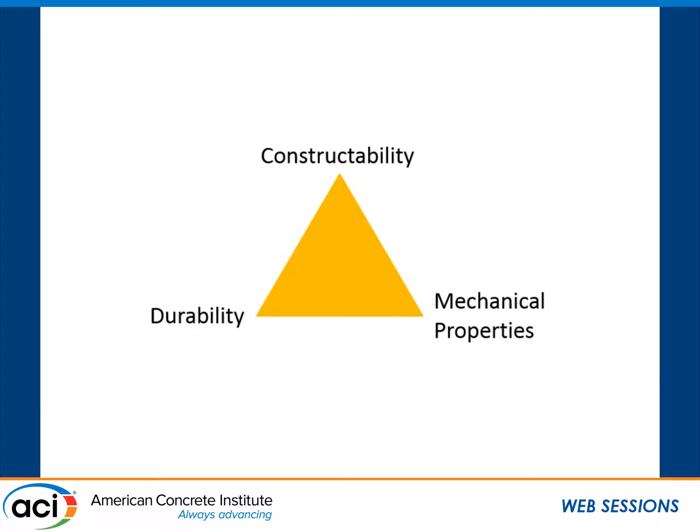Well, I must say that what Ramon said, most everything was absolutely correct. And that's something that has changed, though. Everything he was saying about constructability has to be constructible. We want durability. A lot of specs call for durability, but it has to be constructible. We have to work with material, mechanical properties, structural properties as well. So all these have to be in balance. And typically in the objectives of construction, you're always balancing cost and performance. It's a typical motto for engineers, is to balance that.

But it's changed a bit. The owner will say, I want 125-year service life. I don't want to tell you I want 5,000 PSI. So what's really been the big change is engineering community, the contracting community, used to see specs that called out for at least 5,000 PSI concrete. Now they're seeing something that's 125-year. How do you balance that? How do you bridge that gap? And that's what the whole field of service life engineering has come about because of that.

Now, another thing that's been a huge dynamic is now 51% of all contract vehicles are design build. Design build and operate is making a large change in the way the construction industry conducts its business. We'll hear from Kiewit and the like. That's a main bloodstream for the contracting community is design build now. Because it's design build, the engineer and contractor team up. And that's a big change from the design bid build world where you have a lot of this conflict, finger pointing.

What's good about the new world of design build and design build operate is the fact that you can actually do service life engineering in conjunction with each other to make sure you have your constructability issues and your strength issues and your durability issues to meet the specifications.

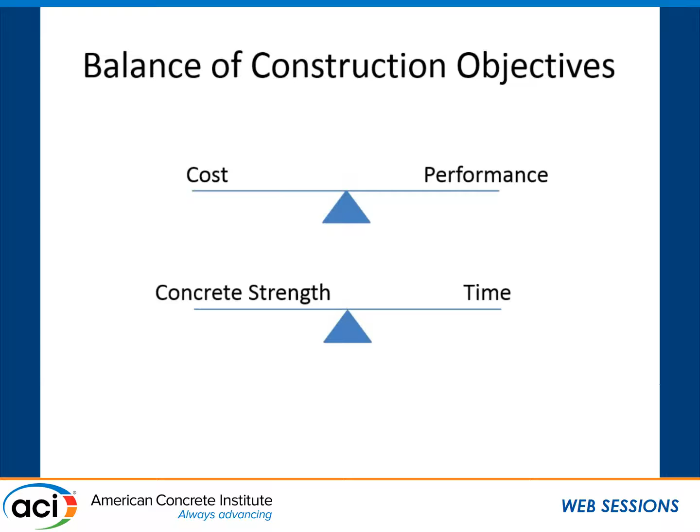An example of some projects that are currently underway that are requiring service life engineering, the St. Lawrence Bridge crossing in Montreal. I must say that it would be nice when they name it because it's all called New Bridge over St. Lawrence. But this bridge has a 125-year service life. It's fast track, has to be built in 2 years.

So it's a very, very aggressive attack. This is a design, build, and operate, where the design and construction team design it, build it in conjunction with the maintenance programs from the operator, and then the owner, country of Canada, wants to know what the condition of that structure will be at 30 years.

They also have some milestones for many different elements. Some are replaceable and some are not. So there's a very complex world with the service life engineering where they're calling out for years, but they're not always the same 125 years. But the contractor and engineer can now team up and look at all the materials available and means available to do this at the lowest cost.

This was St. Lawrence Bridge crossing. This is Lavalin and T.Y. Lin and IVT, main teams.

The Goethals Bridge in New York City. This is a $1.2 billion project, one of the first major design, build, and operate contracts from the New York, New Jersey Port Authority. The structure here has 125-year service life as well. Most of the main elements on this bridge is 125 years. This one's we're working with Kiewit on this project.

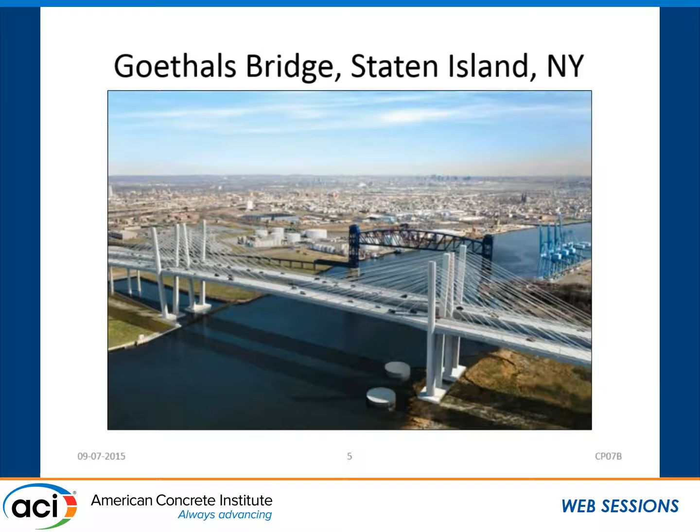The K Bridge in New York City, the same way, 125-year service life. And Tappan Zee Bridge. These are all monumental bridges in the U.S., and this is not all of them. There's at least another dozen structures that all have the specification for service life requirements.

How do you get there? What it is it's a team. Every one of these are a design-build project. So when you have design-build projects, you can actually look at what the owner's looking for and do so in a constructible way that has the strength and aesthetics that you're looking for.

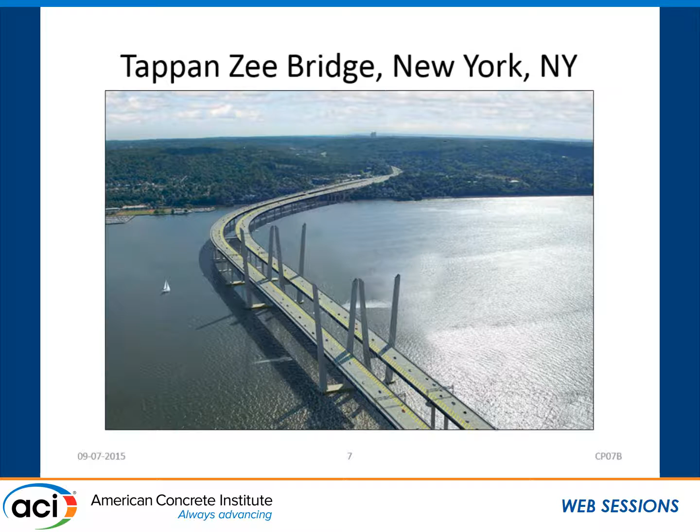A couple case studies that we did. I picked two of them. This is the Pier 5 project in Portsmouth, Virginia. It's set up so you can have 2 aircraft carriers on service at the same time. Owner is the Navy. It is a pier. What they're requiring on this one is a 75-year service life.

Case 2, this is that bridge across the St. Lawrence.

That's a 125-year service life. And the owner is the country of Canada, not Quebec.

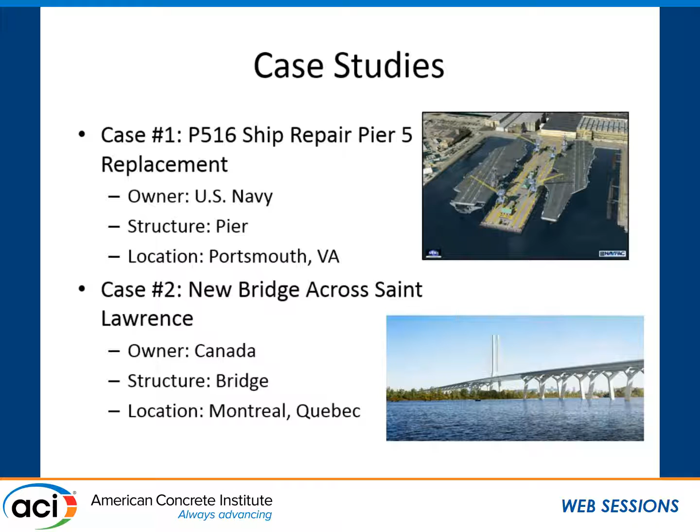On the first case, the project requirements, when you had to put a submittal together: example case 1 is where the design build team puts together the materials, the submittals, all the test materials that are needed to submit into a durability plan to the Navy. So that's what happened, where they put all the requirements there.

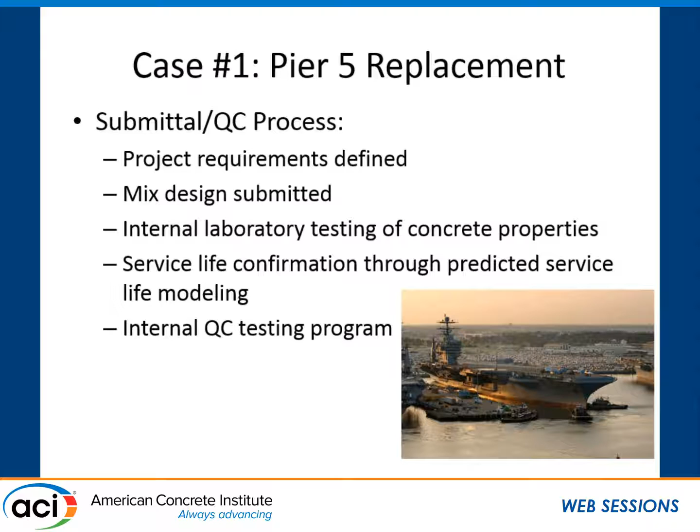The mix design was submitted. The internal laboratory testing is internal to the design build team. The service life modeling justifies their design, and each concrete element and mix would have its own specific quality control plan.

Some things the project had requirements on were service life, defined as the corrosion initiation plus the propagation period, which was about 10 years in the specification. They wanted 75 years to be met.

What they did was try to eliminate some of the guesswork and variability that could occur. The Navy set a lot of the boundary conditions for the modeling itself: temperature, humidity, exposure conditions by element, put together within the specification itself.

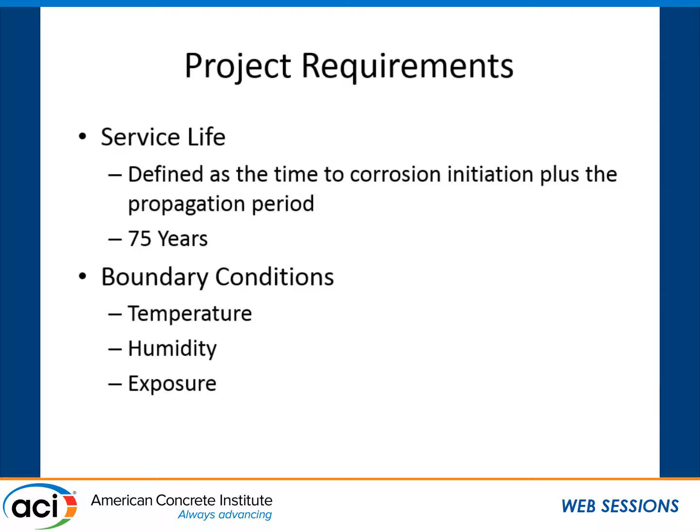The submittal package would then have your durability requirements by the element, the mix design submittal, the concrete mix testing, service life modeling, and then the quality control plan.

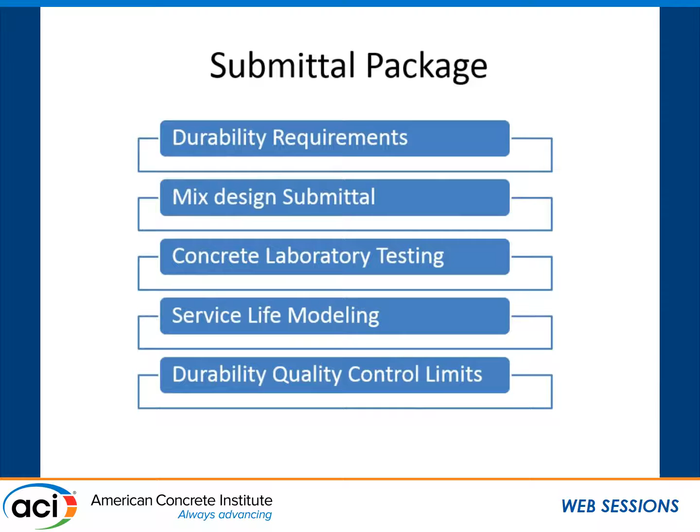The mix design would have the typical mix design you would have: the proportions, the material sources, the concrete properties, the historical performance, the cement mill certs, and the like.

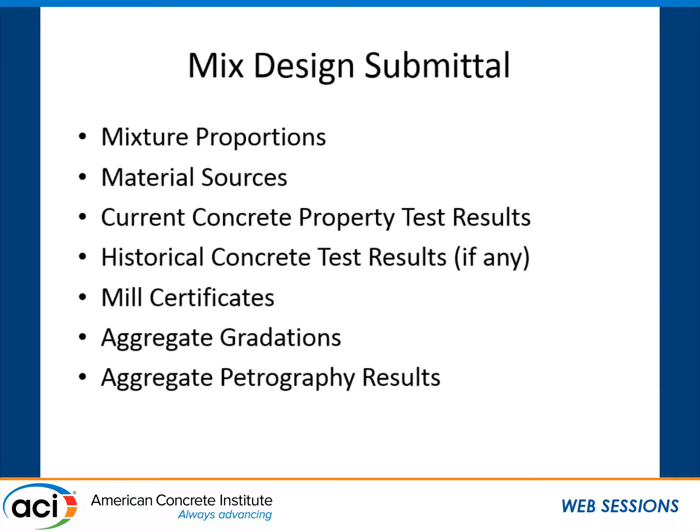The laboratory testing on service life engineering is a little different. What you'd have is the laboratory on transport properties, how things come into concrete and how they come out: the porosity, the ion diffusion coefficient, and the moisture transport coefficient.

Essentially, porosity tells you the number of available voids. The ion diffusion tells you how tortuous those void systems are. And the moisture transport is how water moves in and out.

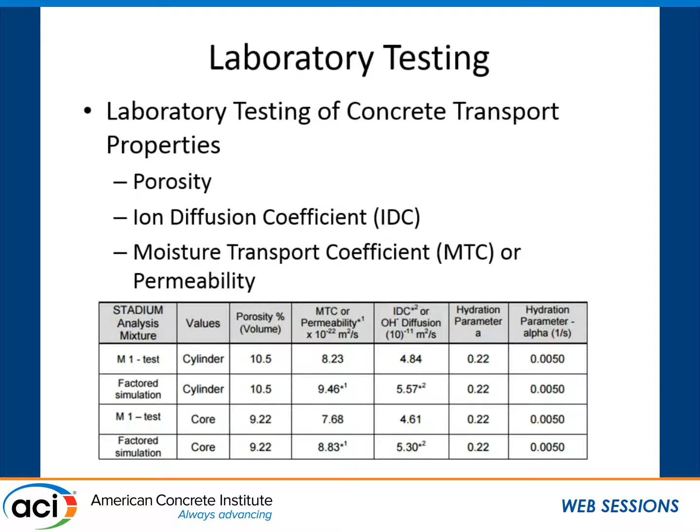So what you would have is a mix, and in the case of the Navy, they wanted a mock-up put together as well as laboratory mixes. So you would have cylinders and cores, and you would have the test results from those so that we can use those going forward into a quality control program.

The data itself would be modeled where you would have predicted chloride content, duration in years, and then eventually critical levels of chloride that would cause corrosion—whether you do nothing with the black steel, or use galvanized or different levels of corrosion inhibitors, you'd have an extension.

As time goes on, you'll see that at this concrete cover, predicted chlorides without any protection means would not make the 75 years. However, putting in a protection system, like calcium nitrite or a different type of reinforcing, will definitely get you that propagation time amount on a deterministic basis.

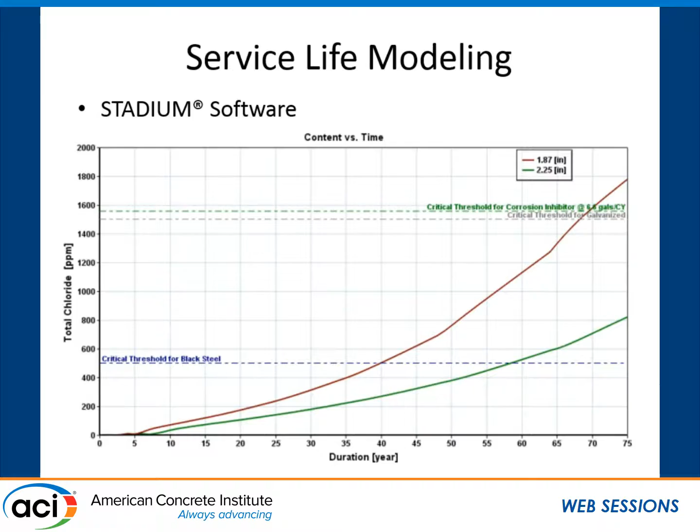Now, when you establish your quality control program, if you know your limits on your properties, then you conduct a lab test to check the compliance of that. If the IDC test data is below requirements, it's acceptable. The lower the number, the better.

Higher than that, it would go into modeling itself. Let's take that value—in itself, that one value doesn't say yes or no. So what you want to do is then model it, to see if it meets those requirements and is acceptable or not.

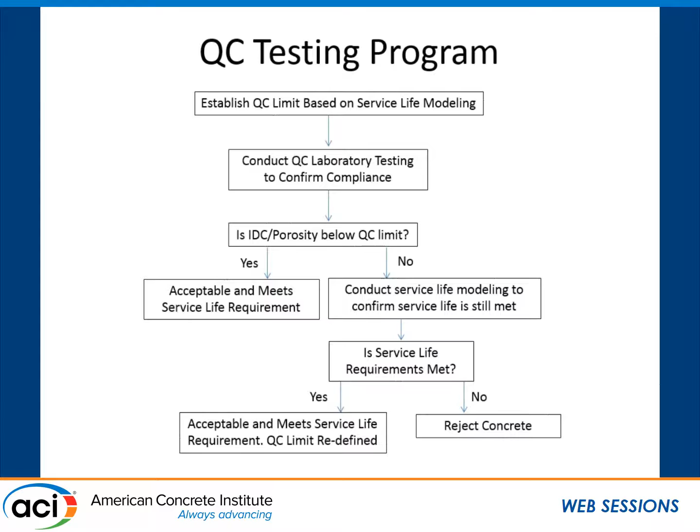When you do enough of these, and you have a project that has enough of it, you can develop a curve in which you have your one parameter and the other parameter and the relationship of acceptance and rejection, the combination of the two major elements.

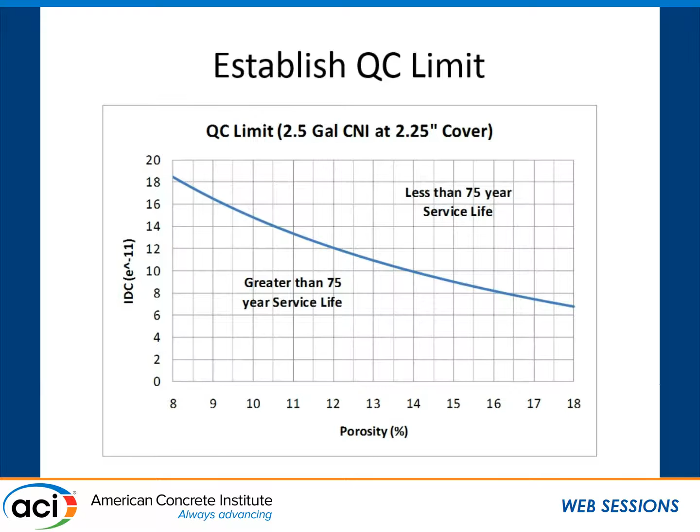You can build a curve so that when you have the data coming in from the field, you can start looking at this and seeing where they comply.

If you have points that are outside, these are the ones that may have one number high but the other number low. What you want to do is run that, and see if it has an effect.

The nice benefit of having that type of option is, let's say this outlier here had a problem, you have that modeling and you have the prediction of that time. Now you can apply repair or protection systems for fixing that area of a structure if necessary.

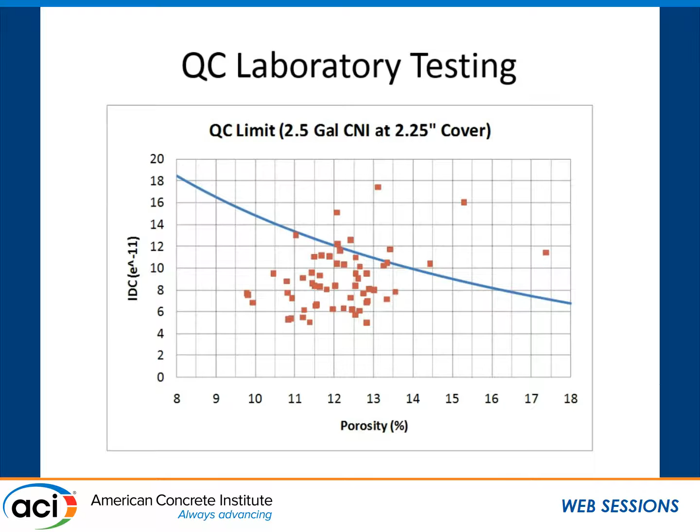Now, the second project, the St. Lawrence Bridge project—this was chosen as different. Sometimes the engineer, contractor, or design build team wants to have full control over everything.

On other cases, the design build team would like to work on the project but have other manufacturers or material suppliers be on the hook to provide some level of performance themselves. So in this case, the ready mix producers and the precast operations had to provide a lot of their own quality control testing on their product.

So in a submittal process here, you would have the project define the durability requirements established in the corrosion plan, the modeling prediction of what needs to have from the material suppliers. The mix designs would be submitted. It's not an RFI, but it would be a submittal. External pre-qualification testing would be provided in that submittal, and then the external quality control program would have to be put in place too.

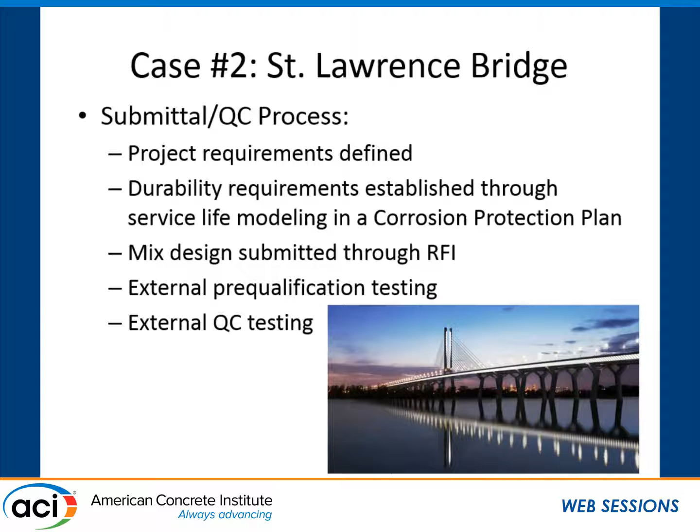They're periodic, I think in the project for St. Lawrence, it's about every 250 cubic meters. They have to run the performance on that mix. So what they would do in this case would be provide a family of mixes.

The producers would come in and run testing on a different level of binary and ternary systems so that they can handle a family of applications on the project. And then their data would come in, and then also this data is tested according to some other rather quick test methods, rapid chloride permeability and more common tests, so that they could actually be correlated together.

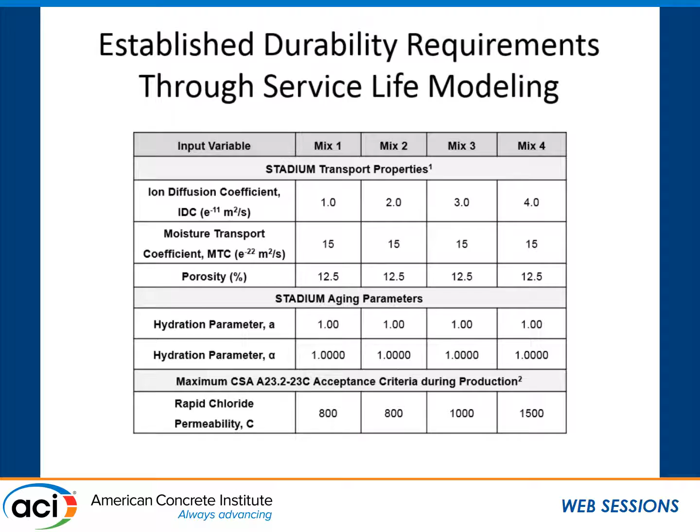Now the pre-qualification testing would be, they need to provide the data on transport test on each of the mix. The rapid chloride permeability, so we can have further future correlation of the transport test and also the RCP test. Then the compressive strengths, the freeze thaw, the scaling, a lot of the tests that you want to have to prevent cracks, like the shrinkage issues and the like.

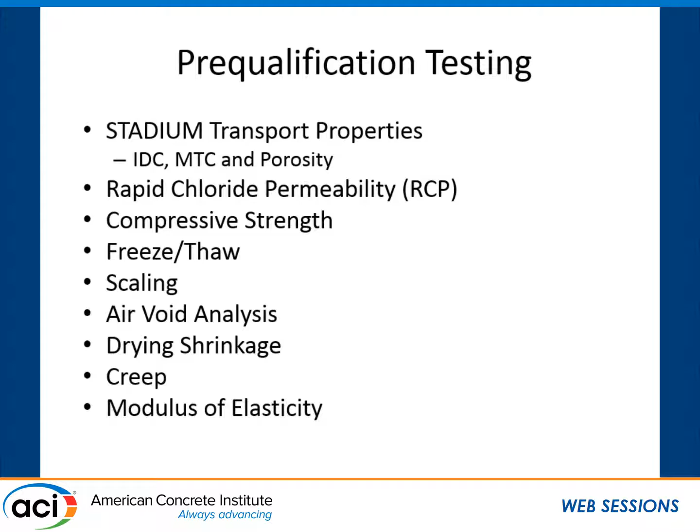The designer and the contractor together tend to team up pretty well to try to eliminate cracking as much as possible. It doesn't do anybody in that team any good if they did. So they try to do their best to minimize that and use the right materials to have the other durability concerns taken care of. The pre-qualification testing does get a little bit more involved when you have transport tests.

Beginning the testing, you get a 28-day test, you get a 28-day accelerated test, and what you get is a rough idea, but it's a data point. Then, as was mentioned, we'd like to see the rapid chloride permeability test as well as the other transport test, the stadium-based testing, run at 90 days and 90 days accelerated so that you can pick some points and have a good data and a maturity curve for that concrete itself.

Now, if it meets it, everything's fine, great. Now, sometimes the concrete itself doesn't have to be the solution for the durability. Sometimes you add other systems. You might have the reinforcing, might be instead of black steel, you want to use a galvanized or an epoxy coating or a stainless steel.

Then you might add surface treatments. You might have coatings. You might have other things that you can apply. So the concrete itself doesn't have to meet it, but the whole package together does.

But in the situation here in St. Lawrence, the concrete portion had its own performance limit that they had to have because they were considering the different types of reinforcing and other types of surface treatments as well.

So what we did was then you can do the rapid chloride permeability and the IDC and develop correlations with the different time periods of maturity, building a curve so that then at a future time you can do these tests more rapidly and be able to say, are you on the right track or not?

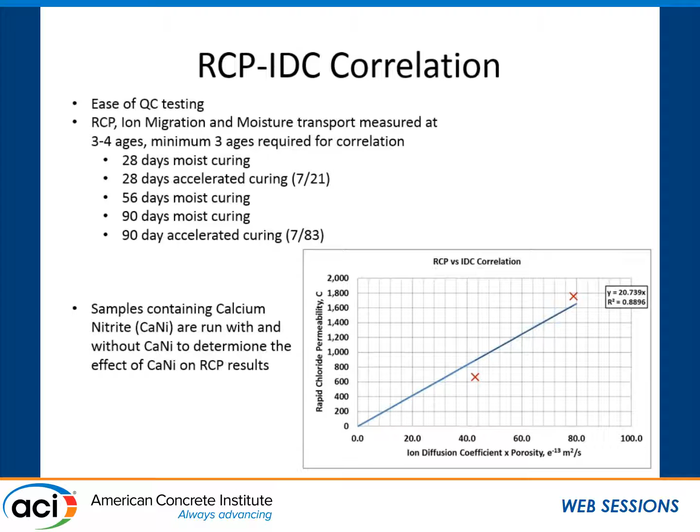And again, I fully agree with Ramon. The best way on this RCP is to do it at the regular 28-day, but also with the accelerated 7 days of normal moist curing at 73 degrees, and then 21 days of accelerated at 100 degrees. This is something very typical of what Virginia would be doing, DOT.

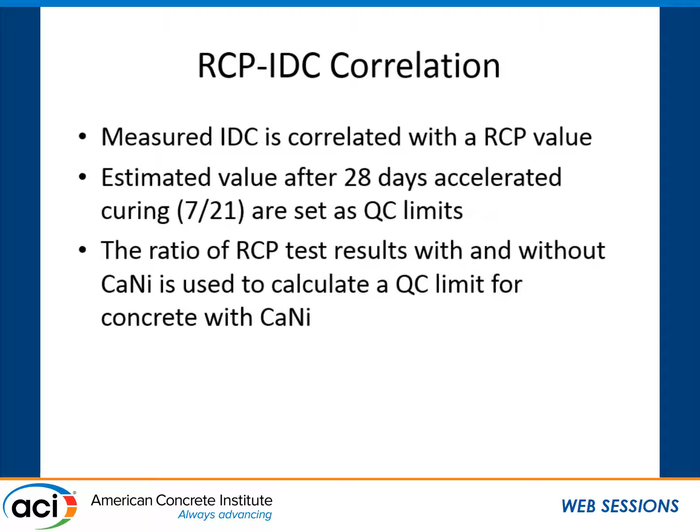And then in this project, the testing itself would go off into third-party laboratories. I think there's laboratories up in Quebec and others that would be running tests. And those limits would be coming down both in RCP as well as in some transport tests periodically.

And then if there's any problems, you can model it. If there's any issues, you can also then come up with a solution with the type of other protection systems to add to that area of the structure.

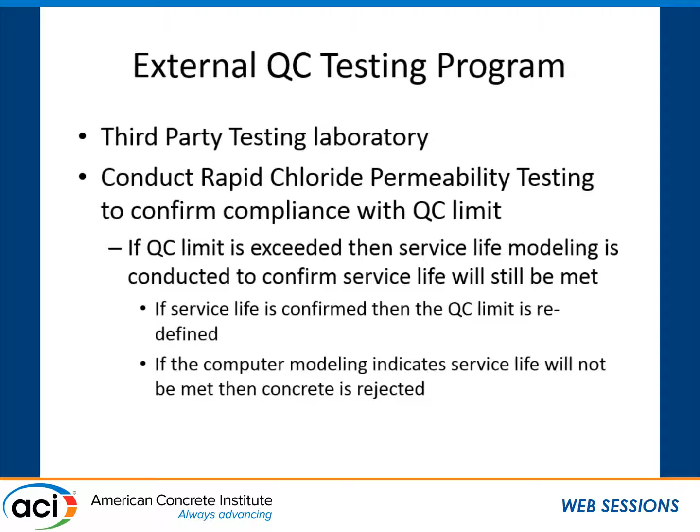So what we had here is a presentation that's based on the fact that this is being done. The fact that design build and operate contracts are out there. This is a perfect venue to put in service life engineering. The team itself wants success, and the owner can actually ask for years and get that delivered to them.